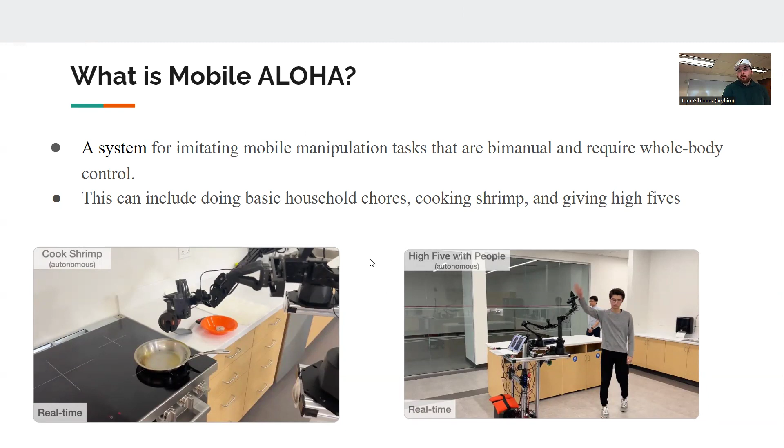So me and Mateen, we had the Mobile ALOHA. There's a picture of it there. It's a system for imitating mobile manipulation tasks that are bimanual and require whole body control. This can include doing basic household chores, such as cooking shrimp, and it can give high fives.

So how it works: it uses imitation learning from human provided demonstrations. Eventually, after enough of the imitation learning, it can complete specific tasks autonomously. It uses teleoperation, so a human can control it physically or remotely, as well as autonomously. And then it uses collected data sets on specific robot hardware platforms.

So here's our website. This is autonomous, no one's controlling it, it's doing it by itself. And then here's just a bunch of other skills I taught it to do, such as wipe wine, call an elevator, and use cabinets.

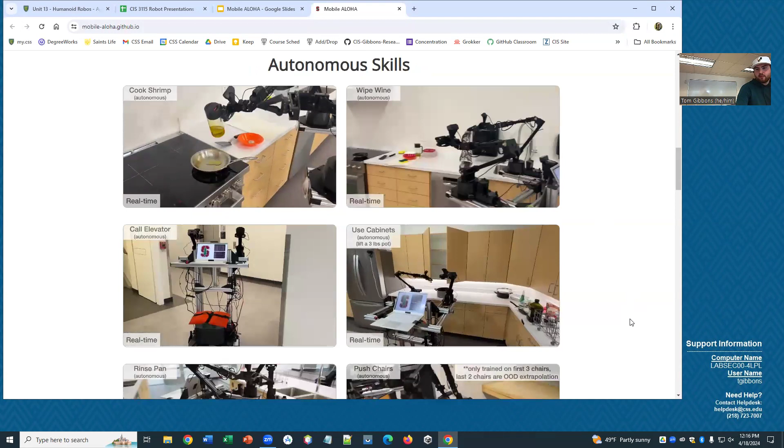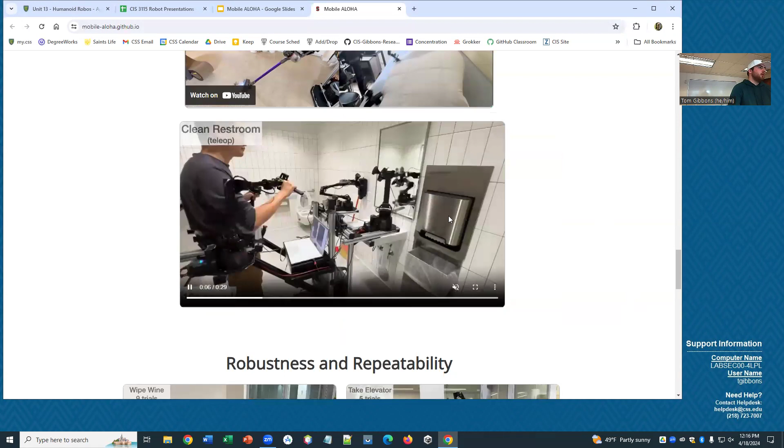Then here's someone actually teleoperating it. So after enough trials, all the data, it should be able to do it autonomously by itself. Like this, it's watching a human do it, and it's learning from that. This is a great example of that.

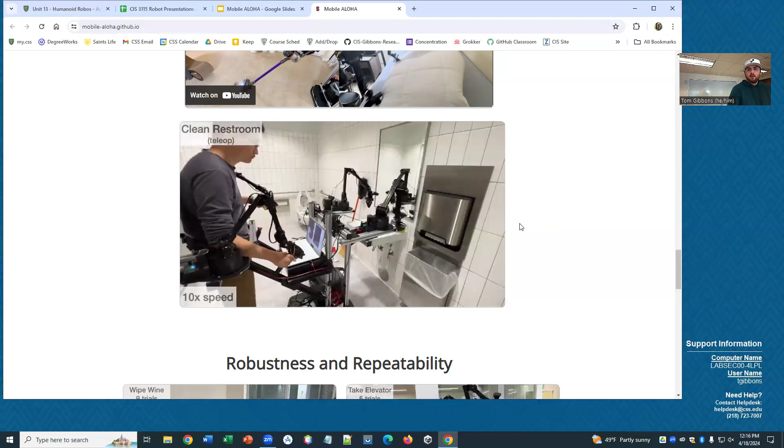So then it shows after a certain amount of trials, it's able to figure out how to do it by itself effectively.

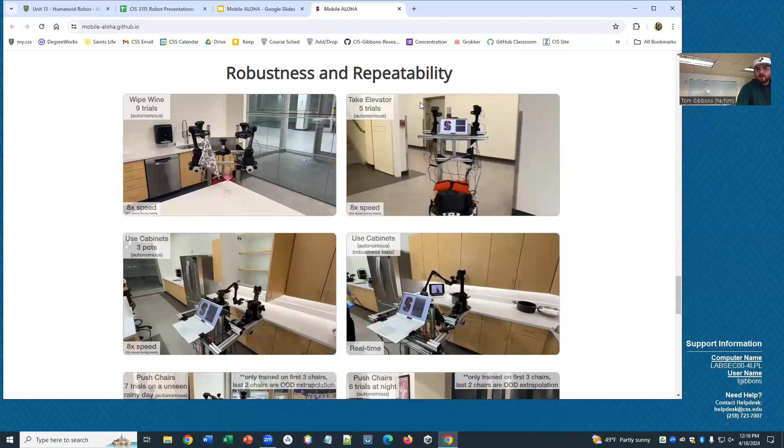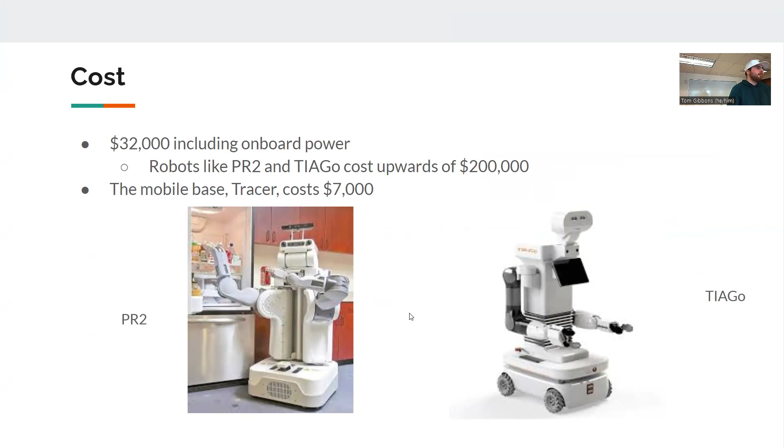So the cost, their whole thing was this is very cost-effective. It's $32,000, including onboard power. Compared to similar robots like the PR2 and the TIAGo, those can cost upwards of $200,000. The mobile base, the main part that moves the machine, is $7,000. Their whole goal was to give it to researchers to help them out. It's definitely expensive, but it's a lot cheaper compared to the alternatives. A robot that's good for research.

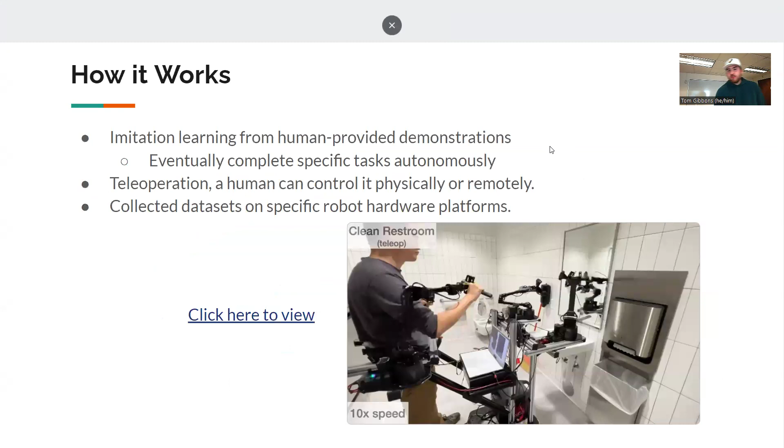How long does it take to train it on a task? Did it take forever? If we go back to the site here, these were created by a Stanford student, so definitely smarter than me, but yeah, like it said, it took 9 trials for it to figure out how to wipe wine. So probably not that long.

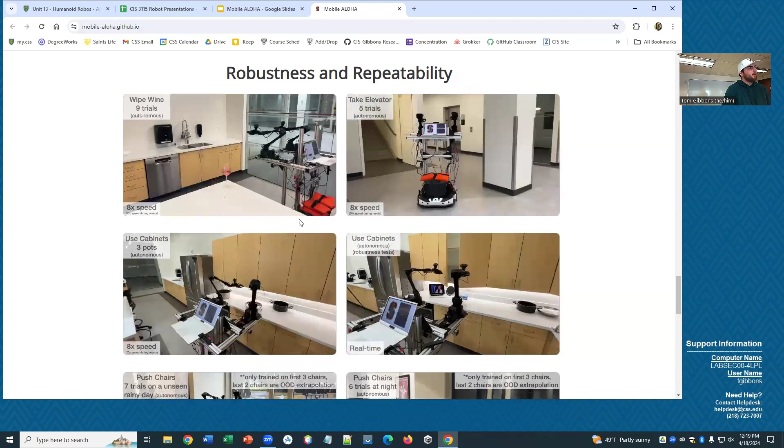Hundreds? No, nothing like that. I think there might be multiple and they're able to share data between each other, so that helps too. And that's what I think will help also, once we start - it's kind of like Tesla and their self-driving cars. Once they get cars out there and driving, they can all share data. They're collecting a lot of it, and with ChatGPT, now that everyone's using it, they're getting a lot more training data simply by people out in the real world.

Just here, just in time, good job. All right, thanks. I got it.

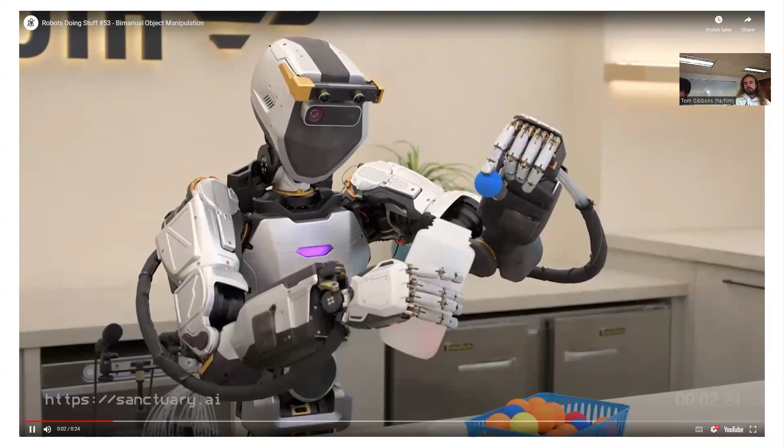Hi, I'm Madison, I'm Jeffrey, and we did our presentation on Phoenix, which is Sanctuary AI's general purpose robot. Here's a video of what the robot is. It's like a humanoid robot that specializes in using human-like hands to do tasks. Here it's just dropping some balls into a jar.

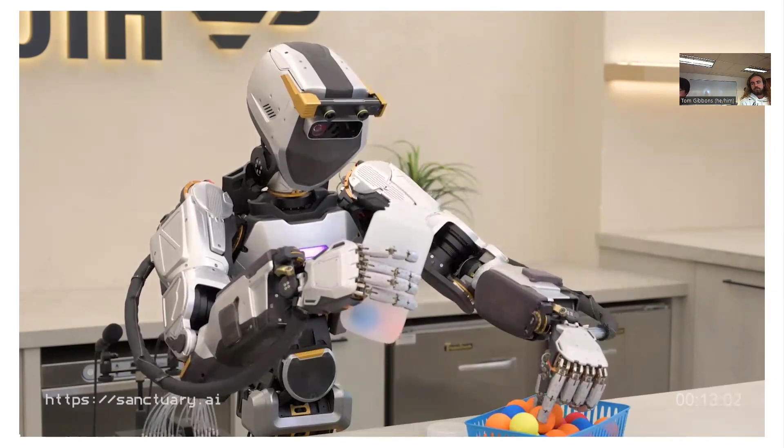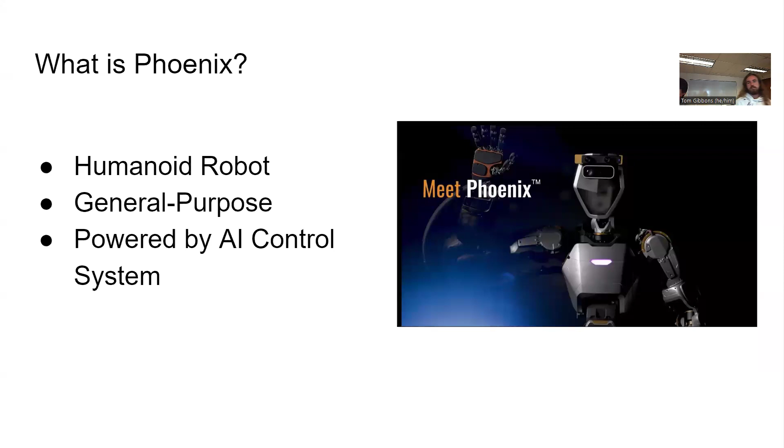What is Phoenix? It's a humanoid, general purpose robot powered by an AI control system, made by Sanctuary AI, founded in 2018. Their mission was to create the world's first human-like intelligent general purpose robots that help us work more safely, efficiently, and sustainably, addressing the labor challenges facing many organizations. The co-founders established Sanctuary AI as a safe place for those with a shared passion for AI and robotics to collectively work on building a human-like brain and system capable of executing human-like tasks safely.

Here's some characteristics of Phoenix. This is currently their 6th generation robot. It's about 5'7" in height and about 155 pounds. It's estimated that it can carry about 55 pounds of weight, and it's made to have human-like features like hands and legs, which are fine-tuned for dexterity.

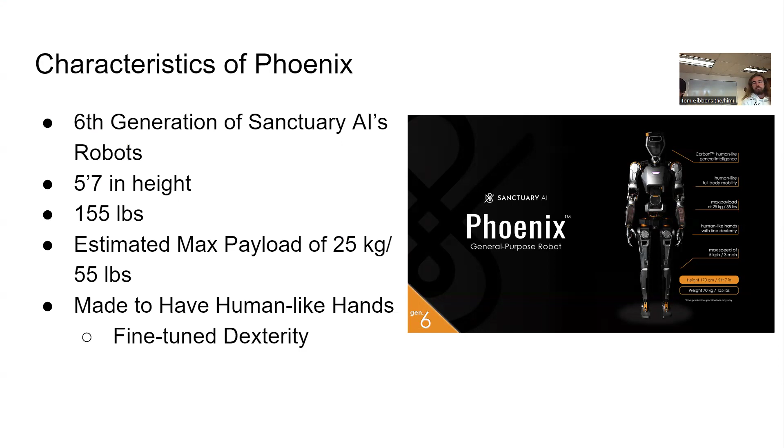What makes Phoenix unique? It's made to augment the human workforce for safety, and it's pilotable by a human or can be used by itself. It has a patented hand-eye coordination system and is trained using teleoperation, so it's hooked up to an operator that trains the movement so it can learn how to do tasks. It uses hydraulics for hands, giving it class-leading strength, dexterity, and speed.

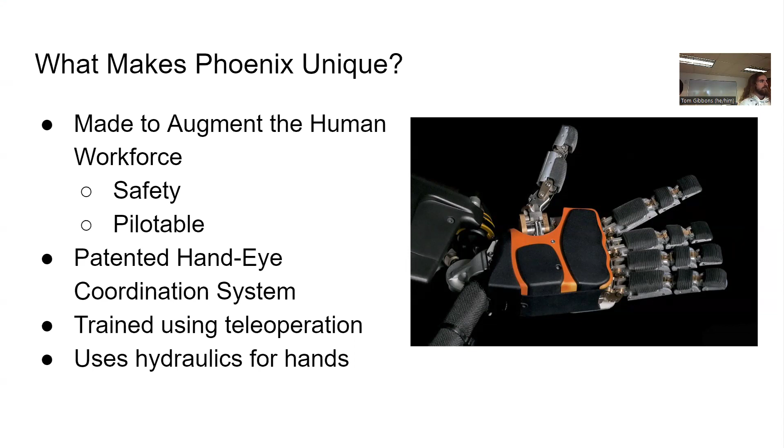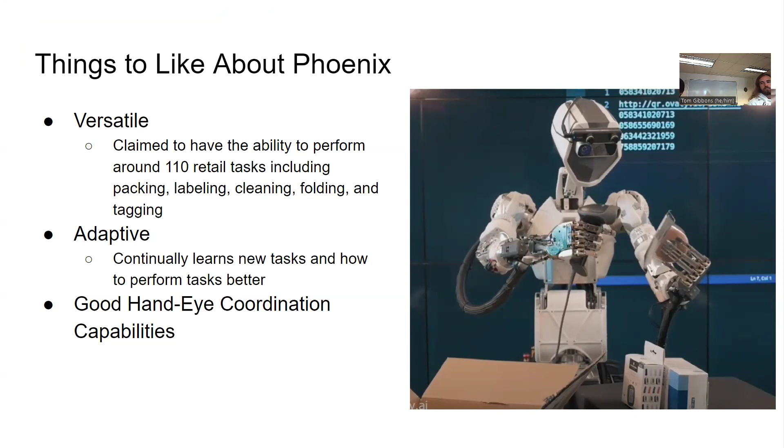Here's some things we like about Phoenix. It's quite versatile, claimed to be able to do about 110 retail tasks. It was taken to an automobile shop and told to do a bunch of different stuff, like packing, labeling, cleaning, folding, and tagging. It's also adaptive, continually learning new tasks with the use of a pilot, and it has good hand-eye coordination for a robot.

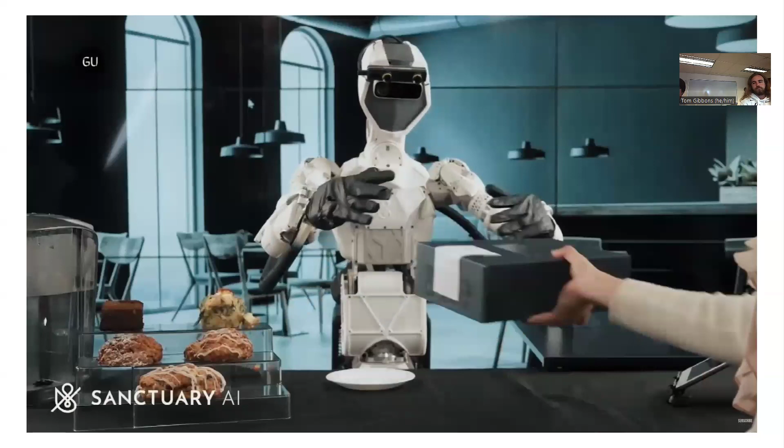Here's a video of it doing a whole bunch of different tasks. So it just picked a blueberry off the tree or something, showing it can handle more fine movements.

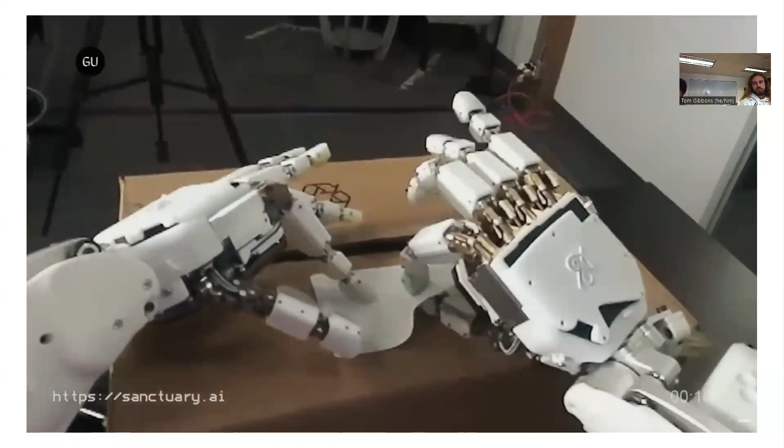The flaws of Phoenix: its humanoid form is generally less efficient compared to other robot designs. It's expensive—the hand hydraulics cause leakage, and working with hydraulics costs a lot for research and development. In the image, we have a picture of one of Boston Dynamics' robots, which has wheels instead of legs. For something like a factory with level flooring, wheels probably work better, but legs can do things like go upstairs and other kinds of tasks.

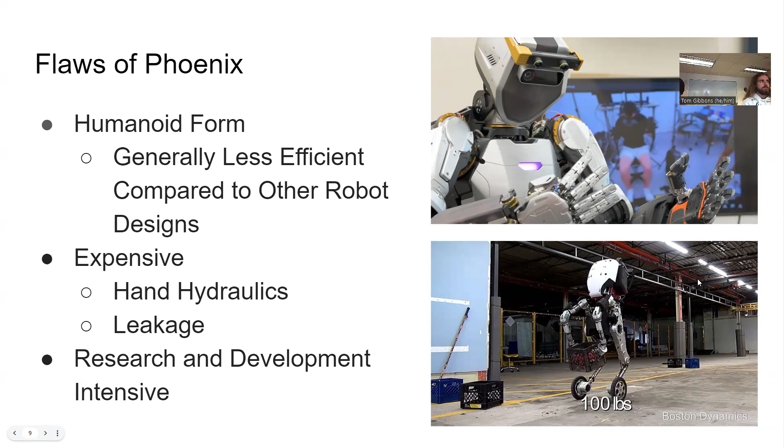I'd say it's interesting to see because there's a lot of talk in this field now about humanoid or not, wheels or not, and why. The argument for humanoid form with hands is that our world is designed for ourselves—our chairs, our stairs, everything is designed for the human shape. So having a human shape kind of helps, but there are other places where wheels might be a better choice. I'm interested as we go to see how human-like these robots are.

Questions? So we saw it doing really delicate tasks—can it do more physically intense tasks that our hand strength couldn't do, but its hand strength could? It depends. It has a payload of about 55 pounds, so there's a limit, but it could probably do a few more things than regular humans can.

All right, sounds good, thank you. Great, so now you want to go next?

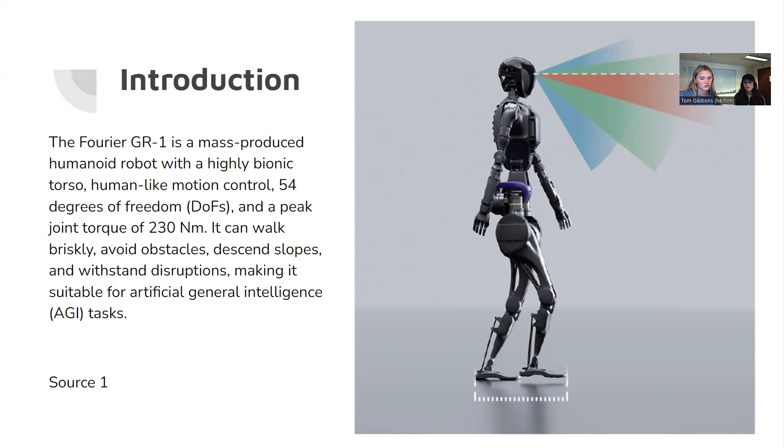Okay, we had the Fourier GR1. It's a mass-produced humanoid robot with highly bionic torso, human-like motion control, 54 degrees of freedom, and a peak joint torque of 230 Newton meters. They can walk briskly, avoid obstacles, descend slopes, and withstand disruptions, making it suitable for artificial general intelligence.

The company is located in Shanghai, China, founded in 2015. The company creates robots that can be used for different kinds of purposes for work and also daily activities, especially their focus on healthcare. They are hoping to innovate better robots in healthcare to help elderly people manage their life in a better way.

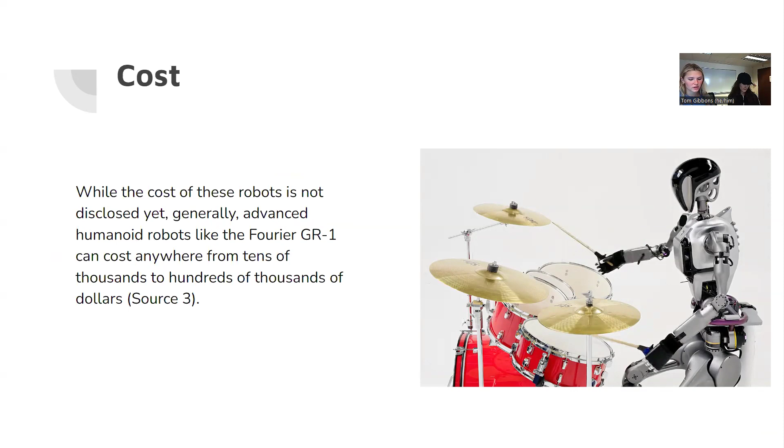While the cost of these robots is not disclosed yet, generally advanced humanoid robots like the Fourier GR1 can cost anywhere from tens of thousands to hundreds of thousands of dollars.

The robots created by this company are human-sized. They are 5 feet 5 inches tall, the same height as me, and their weight is 110. They can lift weight the same as their own size, and they are equipped with sensors that allow them to move their hands like a human. That's one of the special things about these robots.

They also have visual sensors that let them watch their surroundings.

Some other features include 54 degrees of freedom across the body, allowing for a wide range of motion and maneuverability, a peak joint torque of 230 Newton meters providing high agility and dexterity for navigating various terrains and avoiding obstacles, and a dynamic coordination self-balance algorithm enabling the robot to maintain balance in unstable environments without assistance.

It has 4 motion modes and an extensive offline action library, allowing for pre-programmed movements and the ability to learn new ones. It has a natural human gait walking pattern which improves stability, head stabilization for better vision, and energy efficiency.

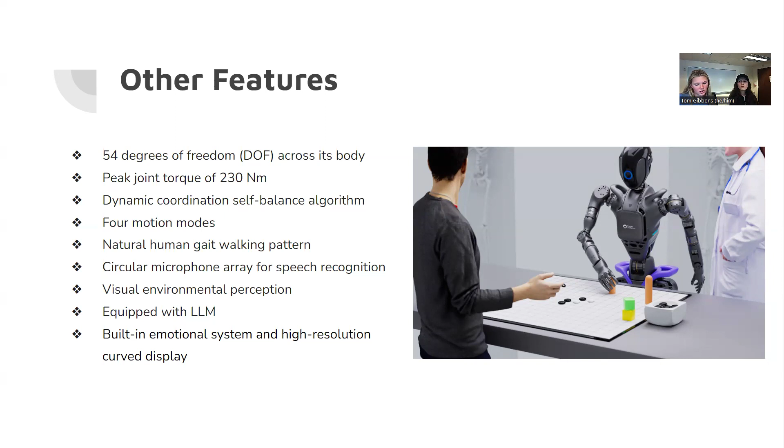It also has a built-in emotional system and high-resolution curved display to allow for natural human-robot interaction.

What makes this robot unique? First, these robots focus on caregiving and physical therapy. Second, they are able to move and interact like a human naturally, using emotion AI to recognize and respond like a human being, along with balance and walking capabilities.

They are equipped with advanced technologies that allow them to walk and navigate different environments, assisting with mobility issues, especially in the healthcare field.

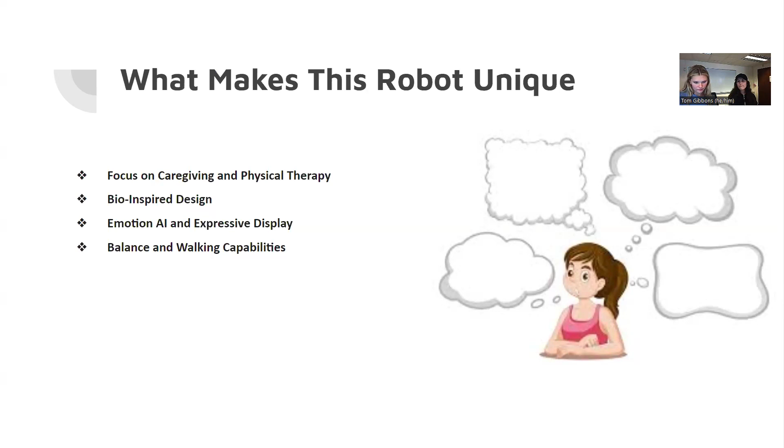Some dislikes about the Fourier GR1: it has an unsettling appearance, which causes concern for its potential health-related tasks. Patients are already experiencing anxieties about their health, so an unfriendly looking robot might exacerbate these anxieties.

The expensive cost of the Fourier GR1 might limit accessibility and opportunities for this robot to contribute to mainstream society. Since this robot might be implemented into healthcare spaces in the near future, there are ethical concerns regarding privacy and security with the medical data processed by the Fourier GR1. Autonomy and control over the robot's movements, especially around the elderly, is important if this robot will be used in the healthcare field.

What we like about this robot: the company is hoping that its caregiving and physical therapy capabilities will become a reality in the future. It will make a huge difference in patients' lives.

The second thing is that it's impressive in healthcare innovation. It will make it much easier for patients to manage their lives, especially elderly people, and also for general purposes. The company is hoping not to just focus on healthcare but also other areas.

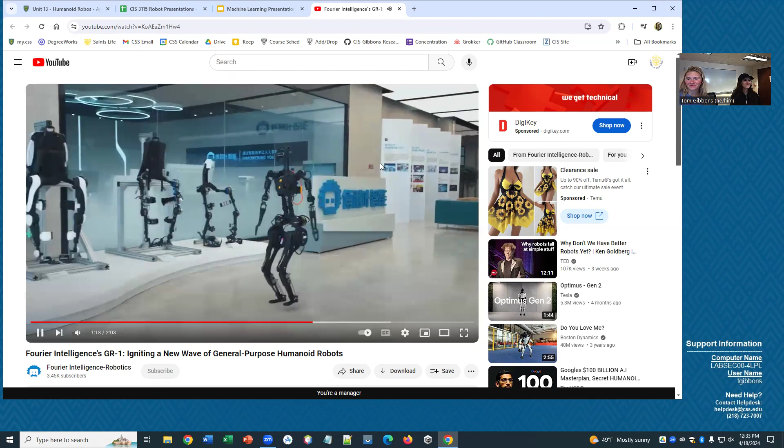I want to know more about emotion—it was supposed to be reading your emotions. Does it try to emote certain feelings? We kind of couldn't find much sources about the actual face part of it. We saw one picture where it had a screen-like implementation on the face, but there wasn't a ton of sources on that quite yet.

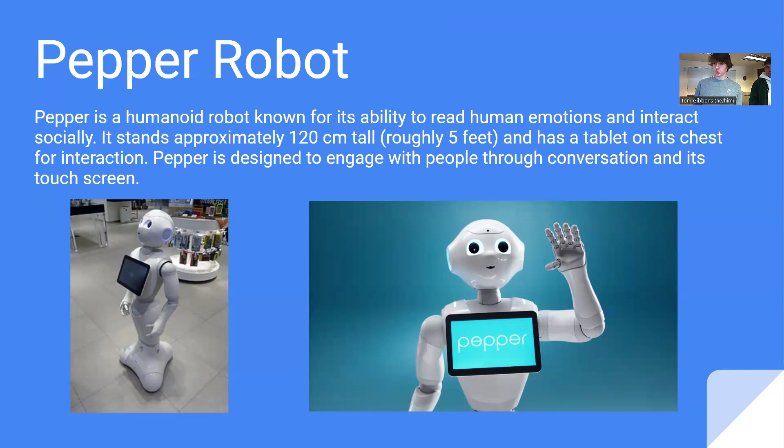Some features of Pepper: it stands 120 centimeters tall and weighs 28 kilograms. It features a touchscreen on its chest and is equipped with voice and facial recognition technology used to interact naturally with humans. Its primary role is to assist and provide companionship in various public and customer service settings.

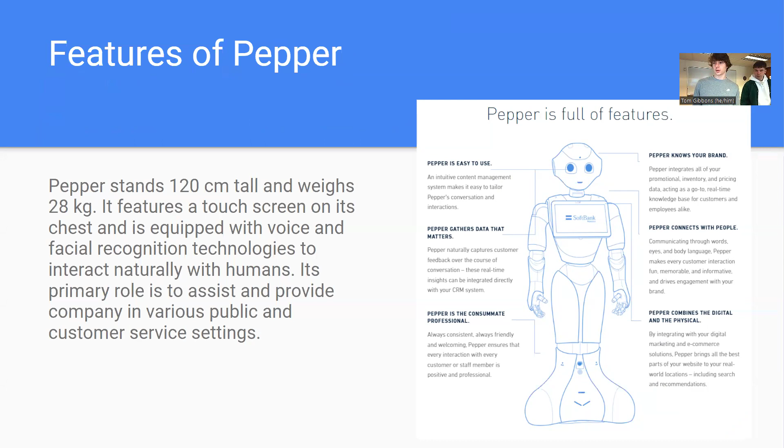Pepper is enhanced with cutting-edge technology that allows it to perceive emotions by analyzing voice tones and facial expressions. This enables Pepper to engage in meaningful interactions, adapting its behavior based on the mood and responses of the people around it.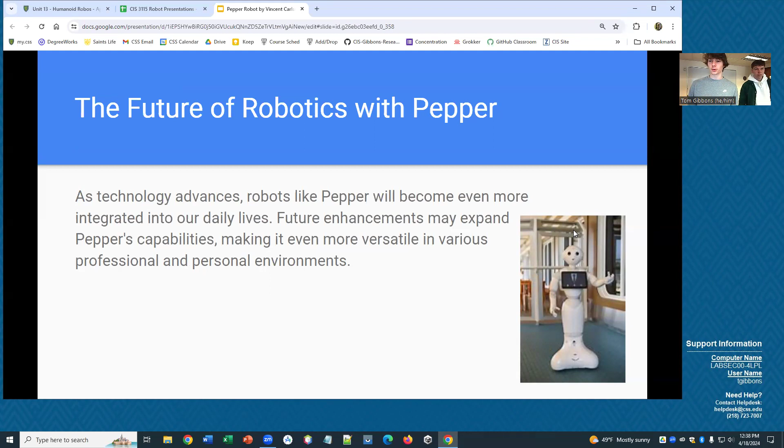Do you think that Pepper could theoretically be used for anxiety patients or people who might not be comfortable with certain situations? Yeah, because it's really like an emotional kind of robot for support, helping people in that way.

I mentioned Shia and her work in care homes. She has a number of Peppers, that's one of her main robot platforms. Oh really? We were just talking to her the other day and she was saying that she's not happy with the Peppers anymore, they're kind of out of date and haven't been updated. Oh, from the other one, so, but that's where they've been using it. All right, thank you.

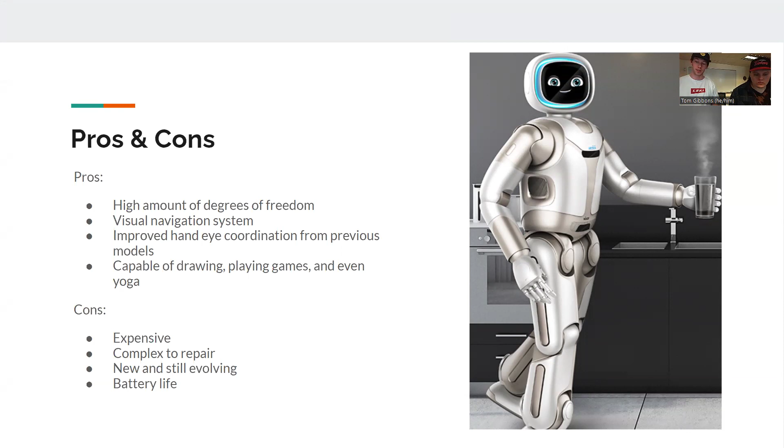Some of the cons are that it's really expensive, and it's very complex and complicated to repair. Some reviews online stated it just got a new update and worked out a lot of flaws it had previously, but there's always going to be something changing and different, as well as the battery life. The biggest real world applications are at-home assistance.

So if someone has limited mobility and can't go to the kitchen and get themselves a glass of water, Walker could do that for them, as well as helping out with chores around the house. It can even function outside on grass.

We saw it go up slopes and upstairs in the video, but it could go outside on grass, which is pretty cool. The image capture and transmission - so that face that Walker has, it's able to see your facial expressions and emotions and then reciprocate an appropriate, hopefully appropriate, response back.

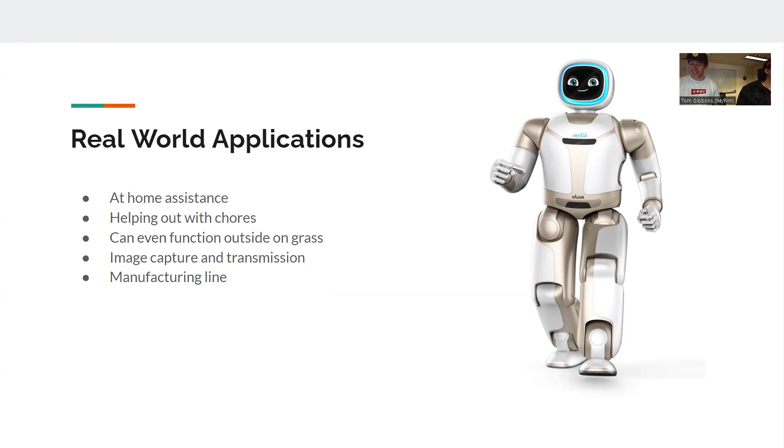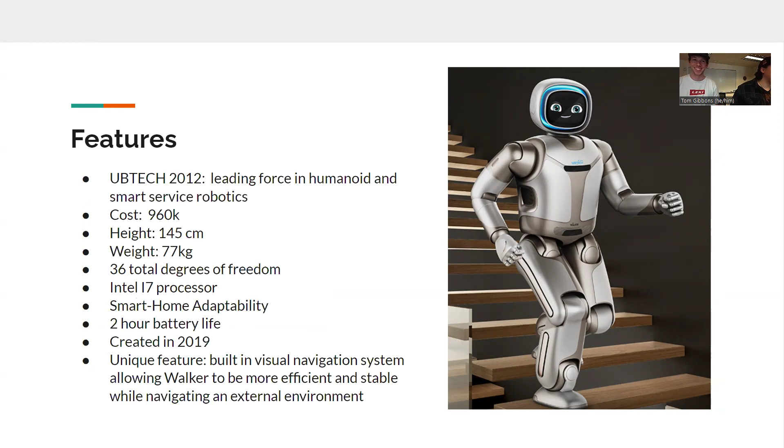Can you tell us the design idea behind the face of the design? I find it a little fun. I noticed that on their website, a lot of the pictures of it just has the same exact face, but we don't know.

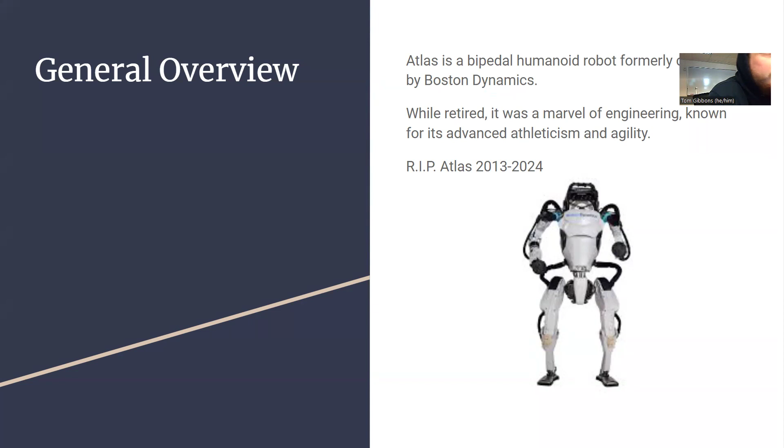Yeah, so I have, I'm not gonna brag, the best robot here. This is Atlas, Boston Dynamics bipedal humanoid robot, developed in 2013 by Boston Dynamics, retired this year.

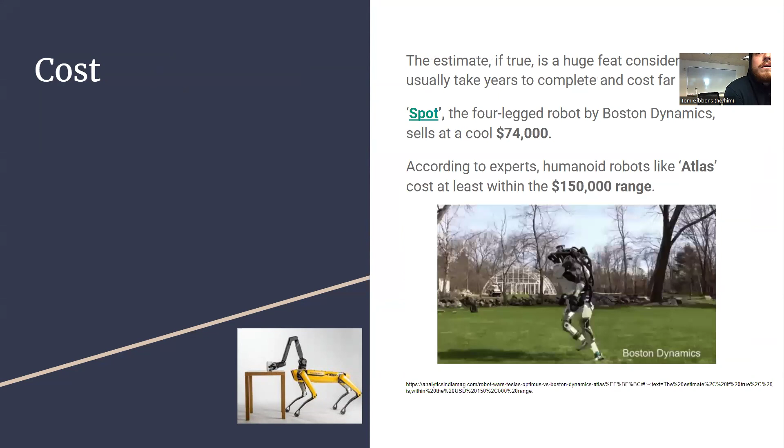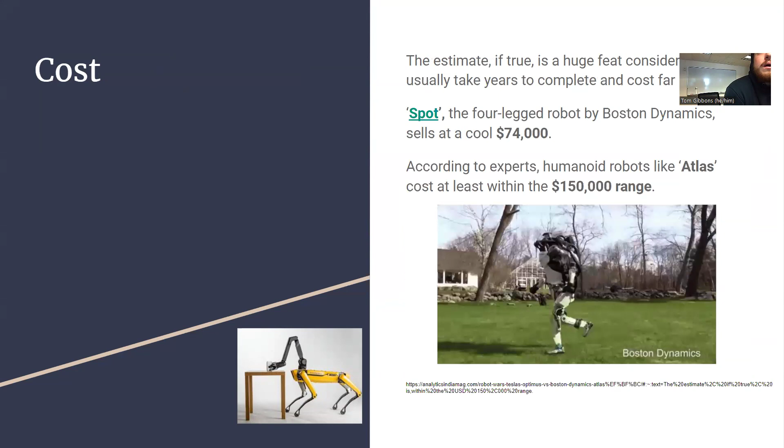Then there's some of Boston Dynamics robots, founded in 1992. They just make robots. They're owned by Hyundai. And then cost, not terrible, but pretty expensive. Their Atlas is about 150,000, and then I think Spot is their cheapest robot right now, which is the yellow dog-like guy, about half that.

So Atlas is kind of huge, 6 foot, 350 pounds. Really advanced, like LiDAR cameras, antennas, has removable hands. So this is in parkour mode right now, which don't want to break those fragile grabbing hands.

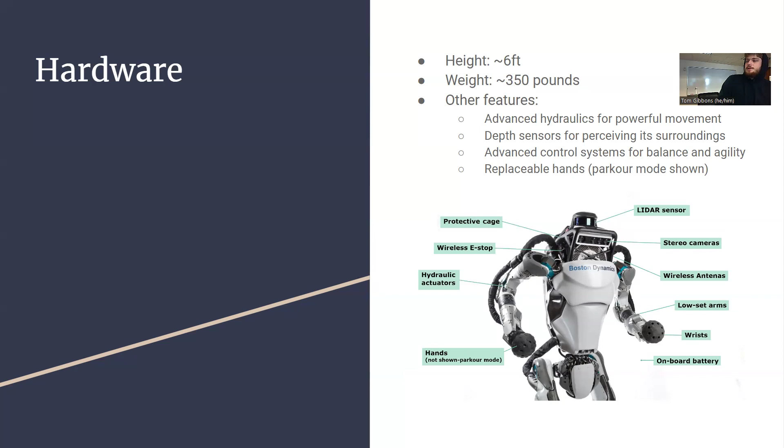But they kind of only used it to showcase parkour. So I got some gifs there. Which, I mean, that's 350 pounds moving. That's pretty impressive.

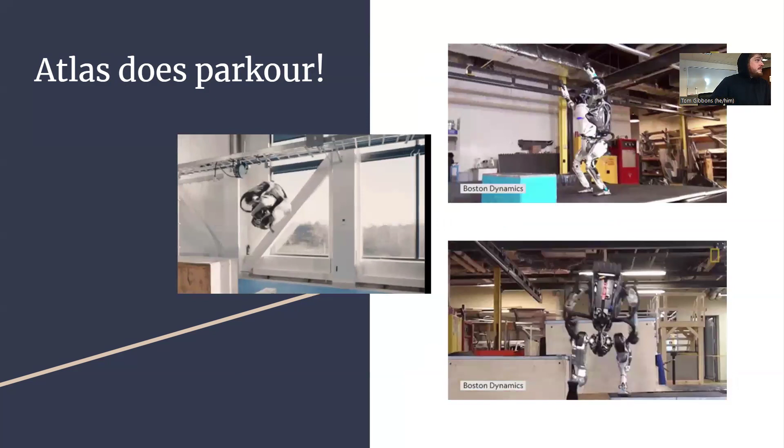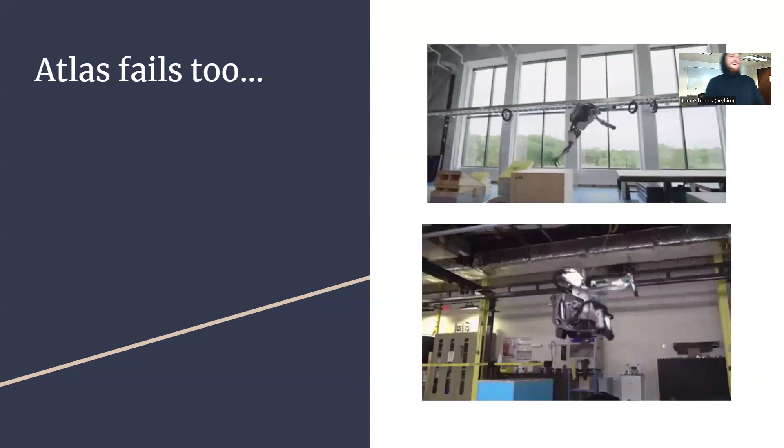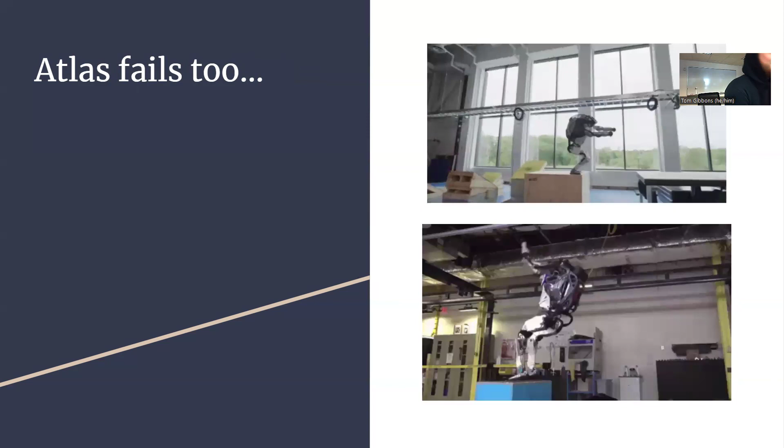Did you, no, so it's been retired, right? Just this year, yeah. Right, like yeah, so it was like as I was assigned this. Well, yeah, because when I looked at it, I thought, oh, this is still up there, still fine, and since I put it on the list, it's been retired, and they released a new one. I think it's, is it still called Atlas or? I like, was too. All right, question? Yeah, that was all that. All right, good job.

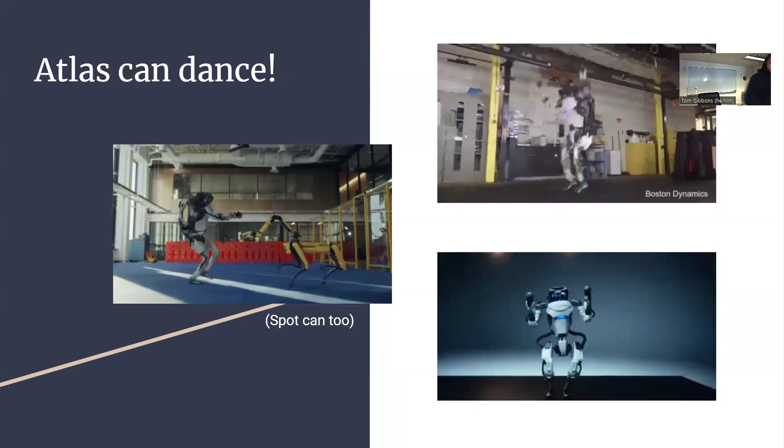So our robot is Sophia. She was created by Hanson Robotics in Hong Kong by David Hanson. The Hanson team has built a worldwide reputation for creating robots that look and act genuinely alive, including renowned robot character Sophia the robot. Our innovation AI research and development, robotics engineering, experiential design, storytelling, and material science bring robots to life as engaging characters, useful products, and as evolving AI. This was quoted by Hanson Robotics.

Overall information: Sophia is a realistic humanoid robot capable of displaying human-like expressions and interacting with people. It's designed for research, education, and entertainment, and helps promote public discussion about AI ethics and the future of robotics. An example fee to book Sophia the robot is in the design range of $40,000 to $74,999. However, any recent popularity change will cause a price fluctuation well beyond this example.

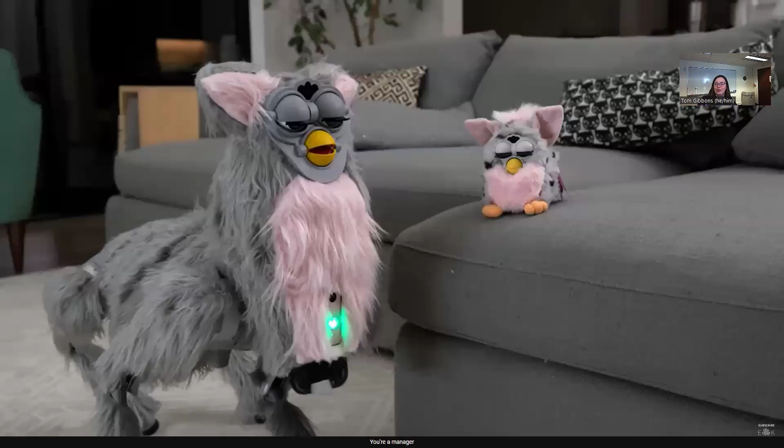You can see the spinning little dial of the sensor. He is accident prone, but you can fix him. He's all fine, that's it. And he still interacts with the other Furbies because he is furry. We don't have video of it, but he can in fact talk. There is a clip of him out there actually introducing himself.

All right, now our opinions about Coco, what we like and dislike. I'll start. Coco is actually really clever, given that it's taking what was initially a simple robotic toy and applying it to a full-size, bigger scale robot, making it functional, able to talk, and still interact with regular Furbies, as well as move about and do whatever it wants.

The level of detail and dedication is actually really, really clever, and it has really surprising levels of artificial intelligence as well. Granted, it can be programmed to say what you want it to say, but it's still pretty cool.

However, it is disturbing. It's a freak of nature. I hate Furbies, and the fact that it makes terrifying noises and sounds, I'm so confused how they thought of this. I'm worried about this one because she wants to make one. I want to make multiple, actually.

My opinion, obviously, I love Coco dearly. I think it's just an amazing example of what the internet can come up with, and I do believe I could recreate it if I wanted to. There's actually one thing I forgot to mention in this PowerPoint: it has a cursed mode.

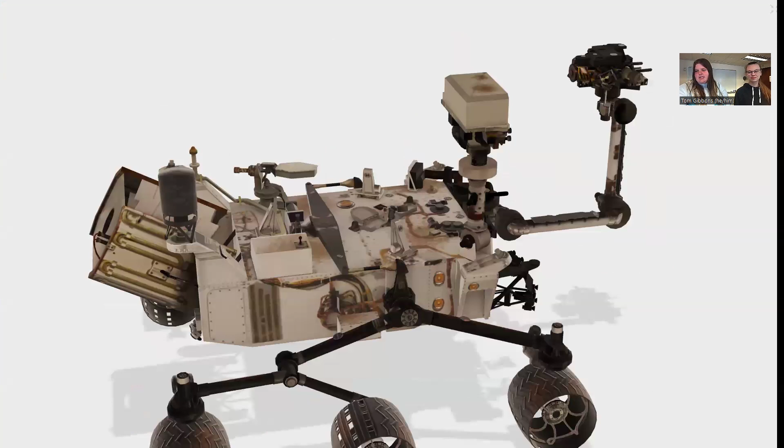And here is our little guy. So in here he's active, so you can see all his wheels, you can see the different stuff. This is technically his face, but this is also his face, it just depends. They both have cameras. You have the sensors.

This is how he charges. I think it's either this or this one, I can never remember. But he's charged by... okay hold on, I have the notes on my phone. Yes, okay, it's just the one thing about how he stays charged.

So he stays charged, he carries a radioisotope power system that generates electricity from the heat of plutonium radioactive decay, also known as RTG. And NASA estimates that he should last another 14 years before he stops working.

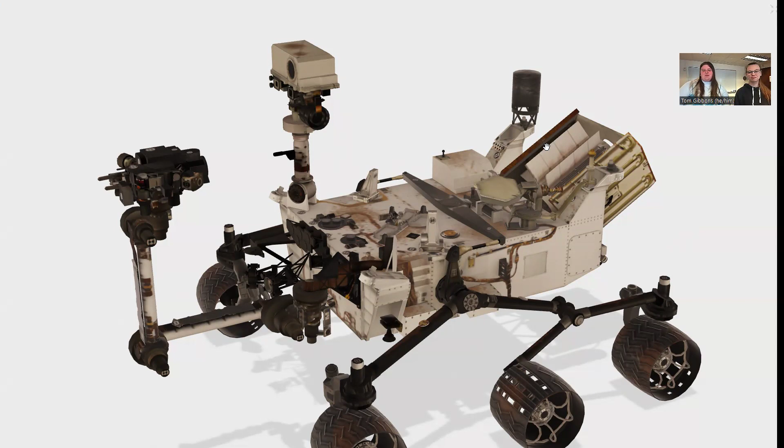Yeah, and he's a cutie, he lives up to his name. Yeah, so Curiosity is about the size of a small car. He's 9 feet long, also 9 feet wide, and he weighs about 2,000 pounds. And then his wheels are like 20 inches in diameter, so it's pretty big.

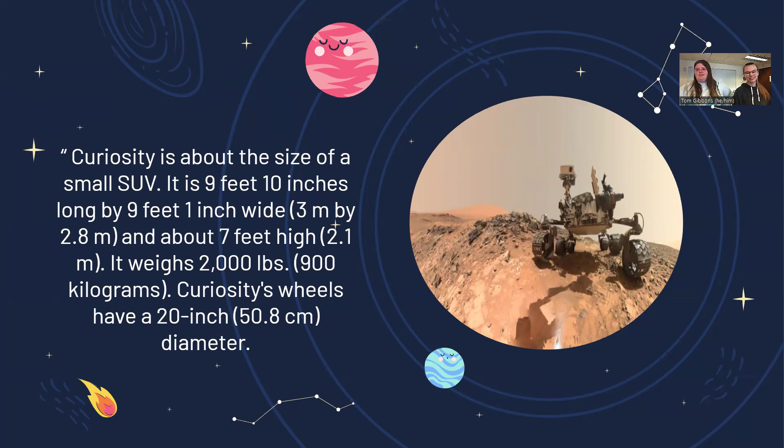And then this is like the body that we saw, which is the structure to protect his vital organs. He has a brain that processes the information that he's seeing. He has eyes and other senses, like cameras and different instruments to be able to see the surroundings and everything.

And if you go on the NASA website, you can follow what he's doing. They upload his photos daily of where he's going and what he's doing. Then he has his arms and hands to extend and reach and collect rock samples.

When NASA, I think last year or 2 years ago, was planning to shut him down, people were getting so upset, and Curiosity, I don't know how, but somehow he knew, and he sent code back to NASA and was like grabbing extra rocks to give back to his creator. It was so sweet.

His energy is like the batteries and power that we were talking about. He has an antenna for speaking and listening, to send back to NASA. Temperature controls to make sure he doesn't overheat, as well as a neck and head, which is that camera that we showed originally.

And then likes and dislikes: obviously we love Curiosity, he's a sweetie pie. And then we don't like that NASA tried to discontinue him. Curiosity is perfect and he should live his full extended life. But yeah.

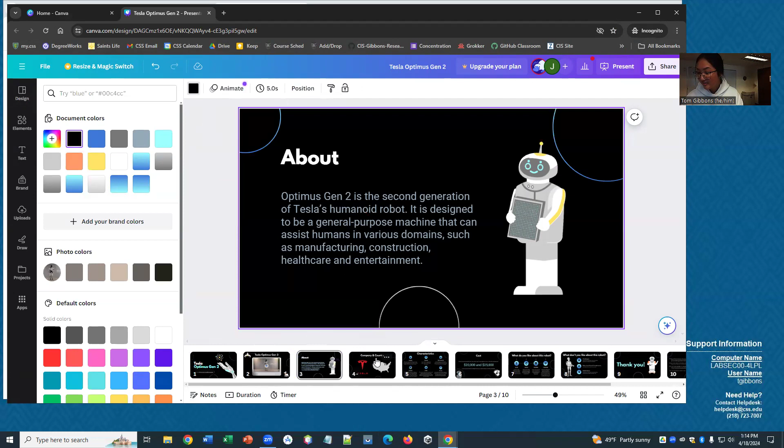Okay, there we go. Oh, maybe not. No, is the text there? Is the background just the wrong color? No, none of that text is there. Well, I think it might be there. We just—oh, can't see it, just see? Okay, so can I just change everything? Can you change the background? There, yeah, okay, so should switch. That's weird. You can also just try pressing present and it should just pull it up. I did on my computer. Makes sense, that's weird.

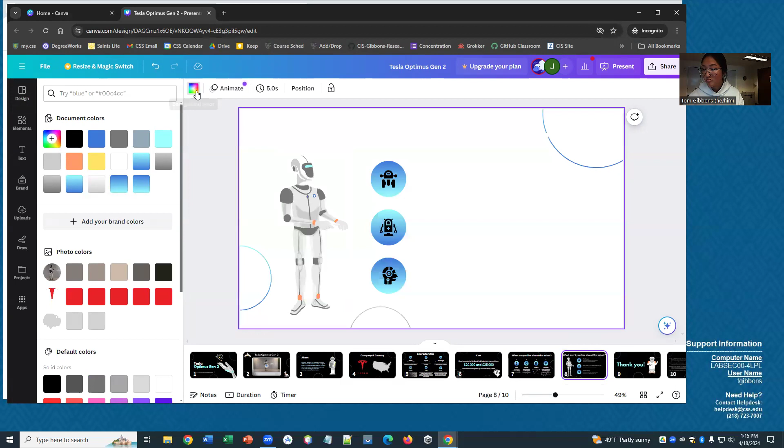Okay, right. So we had the Tesla robot, which is called the Optimus, and we did the Gen 2. So this is the little video about it.

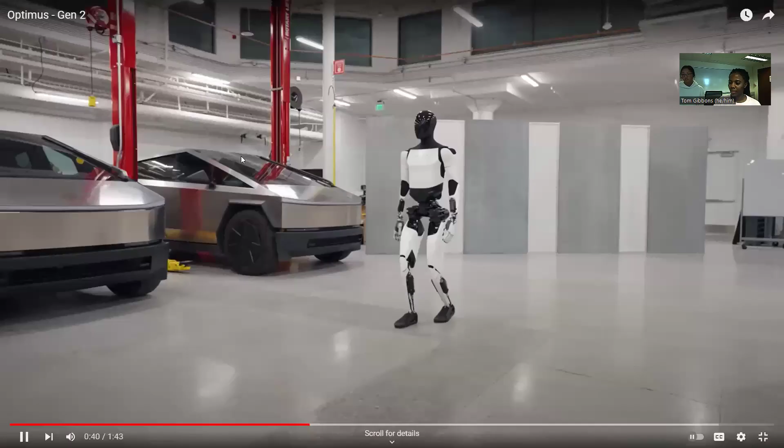So Bumblebee was their first trial, and then they had the Gen 1, and then this is the Gen 2—or this is the Gen 2. So that's what he looks like. So there's it walking.

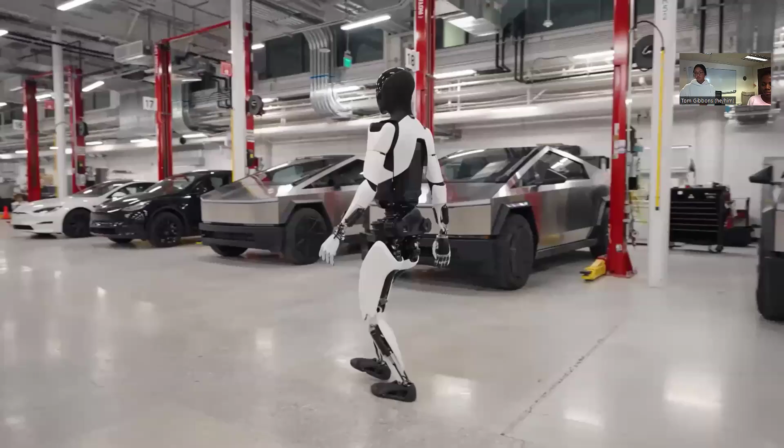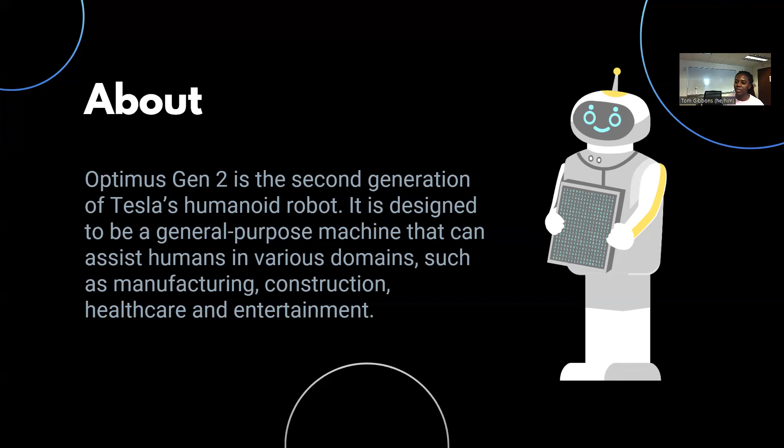All right, okay, so about the robot, the Optimus Gen 2 is the second generation of Tesla's humanoid robot. It is designed to be a general purpose machine that can assist humans in various domains such as manufacturing, construction, healthcare, and entertainment.

So obviously the Optimus 2 was created by Tesla in the United States. They just moved their headquarters from California to Texas, so that's where they're located now. And this Gen 2 version came out in December of 2023, so that's where this one was created.

So the characteristics of the robot: for the height, the robot stands at 5 feet 8 inches tall and weighs 121 pounds, which is 22 pounds lighter than the previous version. It can run at a speed of 5 miles per hour, which is 30% faster than before. It has 35 degrees of freedom, which means it can move its joints in various directions and angles.

The robot's hands have 11 degrees of freedom and are equipped with tactile sensors and faster actuators, which allows it to manipulate objects and do very delicate things, like you saw it holding the egg and stuff. The robot's feet have a more natural shape and have force sensors and articulated toes, which enable it to balance better and walk more smoothly, and also its speed is faster, so it's able to walk more quickly.

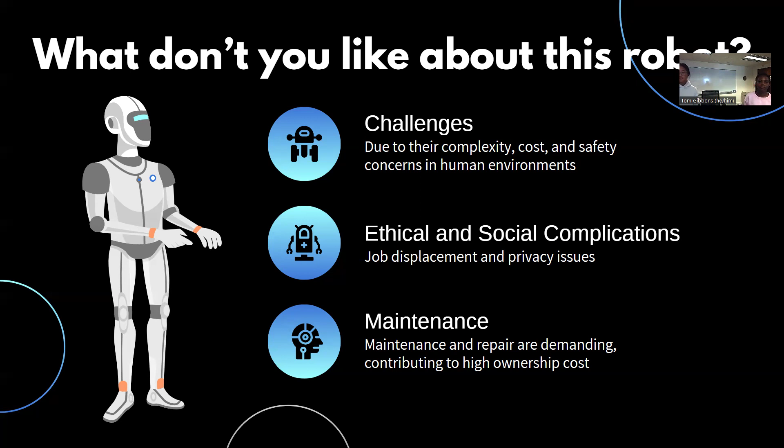And then ethical and social complications, so just things like job displacement and privacy issues with the robot, and it has so much potential that it could take jobs from many people, like the daily tasks. And then its maintenance—the maintenance and repair are pretty demanding for this robot, which contributes to high ownership costs. And yeah, thank you.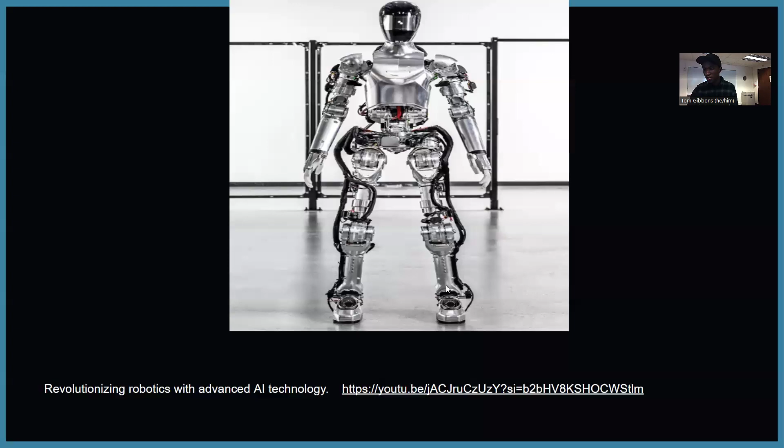And then this is a cool video showing what it looks like, the humanoid. Complex topics can be challenging, so I like to simplify them. Thank you.

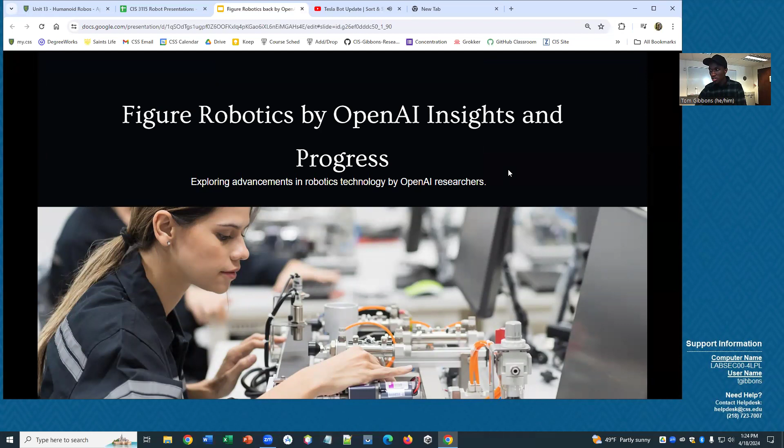So it's an innovative robotic solution, which is revolutionizing industries through advanced robotic technology development. It's AI-powered automation advancement for tomorrow's industries. So those are some of the key points about Figure Robotics.

Also, with the first humanoid by our side in the workforce, we have the ability to create and produce so much more, address drastic labor shortages, and reduce the number of workers in unsafe jobs. So there are some jobs that are unsafe for human beings to be involved in, so we can put this humanoid to replace us, and we can be safer in those jobs.

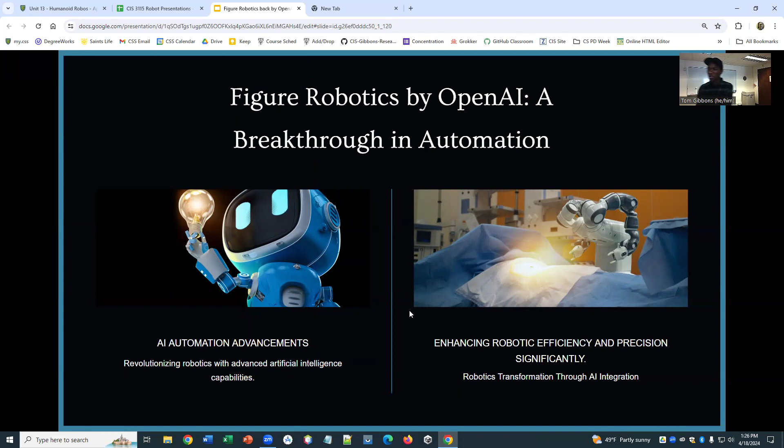So one of the things I liked from my presentation, I saw a quote which says: they've designed our world for the human form. Hands allow us to open doors and use tools. Arms and legs allow us to move efficiently, climb stairs, lift boxes, and more. Figure One brings together the dexterity of the human form and cutting-edge AI to go beyond single-function robots, and lend support across manufacturing, logistics, warehousing, and retail. So as you can see, it can cut across multiple industries like manufacturing, logistics, warehousing, and retail.

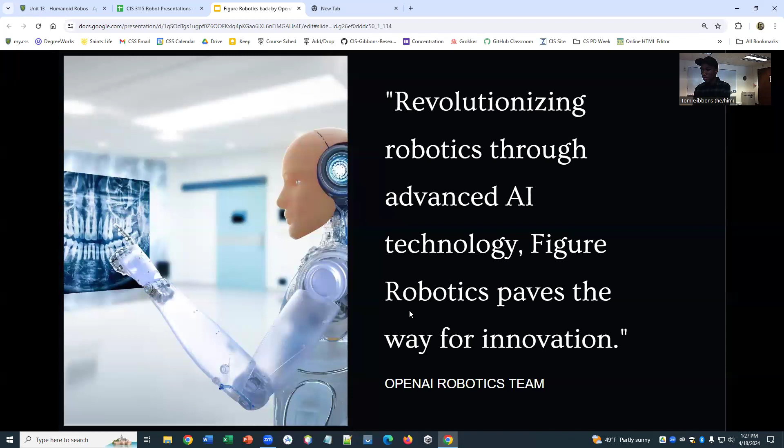So it's pretty much impressive. Revolutionizing robotics through advanced AI technology, Figure Robotics paves the way for innovation. So what makes this robot unique? The first thing is its innovative design. It's made in such a way that it mimics a human form, so it's much more similar to a human, and it can perform tasks just like a human being.

And it has advanced AI integration, utilizing cutting-edge AI technologies to enhance its autonomy. Lastly, quick development - it has been developed quite quickly in the past 12 months, showcasing their technical prowess and dedication. What I like about this robot, the first thing, is its versatility and efficiency.

Its design and functionality promise to revolutionize multiple industries by performing tasks that are currently limited to human workers. It also has potential for impact by taking on roles in industries like manufacturing and logistics. It aims to address labor shortages and improve safety by reducing the need for human presence in hazardous areas, as I talked about before.

What I don't like about this robot is its complexity and maintenance. The high complexity of this robot might pose significant challenges in terms of maintenance and repair, potentially leading to higher operational costs. The other thing is employment concerns - since it's much more like a human, it is likely to take away human workers, which might lead to social and economic issues. These are my references.